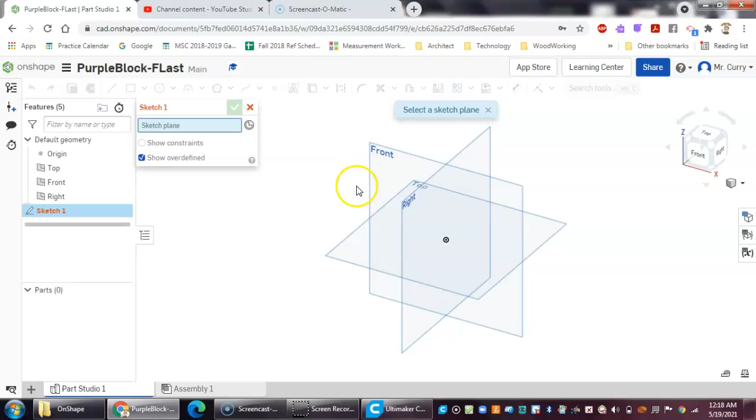So we'll go right here to sketch. We're going to sketch on the front plane. That opens up, and I'll come up here and click my rectangle tool to draw my rectangle. Come right down here and select on your origin and just kind of move it up.

Now notice I'm in the isometric view, so I can draw it this way if you want. If it's easier for you to go over to your front plane and pull up and just have it on the front plane, then by all means use the front plane too.

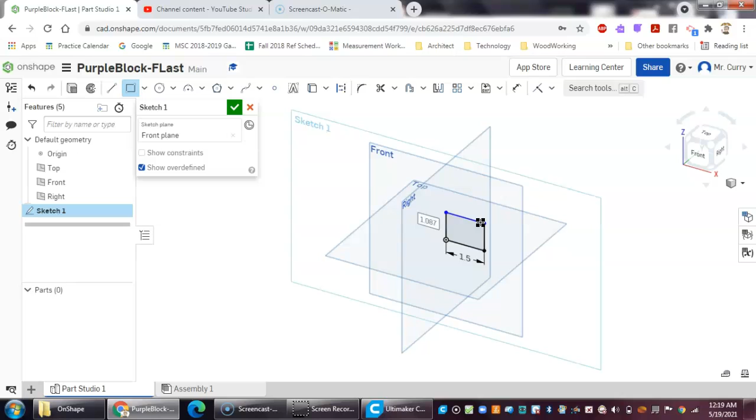So I'm going to left click to place that. First now is my width of 1.5. I'll hit enter, and now I want to set the height of 1 inch, and I'll hit enter. That's all I'm doing right now. So that rectangle is done. We'll click the check mark.

Now I want to extrude that. So let's go ahead and hit the extrude button, come over and select that shape. In this case I want that to be a depth of 1, but I don't want it coming out toward the screen with me. I always kind of prefer to draw it going back into the screen. I don't know why, it's just kind of my habit and preference that I use. I'll go ahead and click the check mark there.

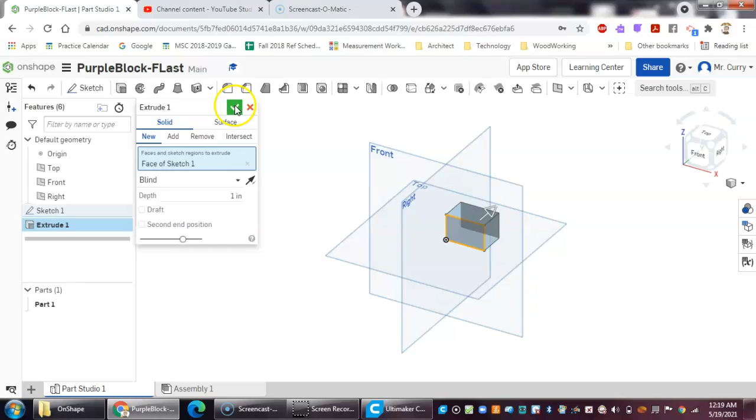Now at this point, I've got a 1 inch high by 1.5 inch wide by 1 inch deep block. We're going to have to select some other surfaces here and think about where we need material to be removed from that purple block. And then we can select different faces to do that.

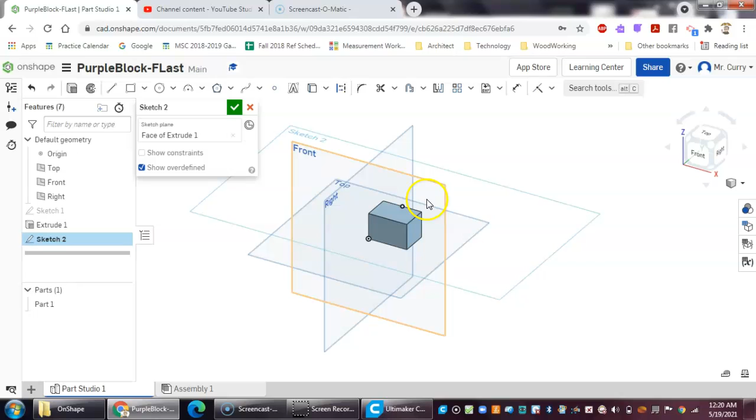So to start with, I know if I'm looking in the top view that I've got some areas cut out. So I'm going to now start my sketch and I'm going to select the top view. Now I don't have to, I could start any place else. This is up to you.

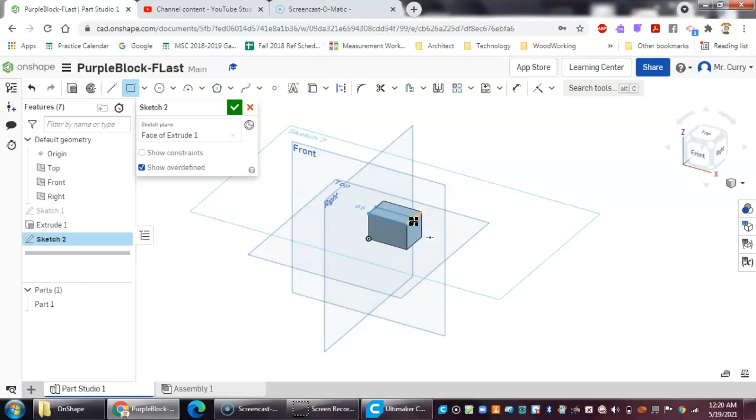So again, I'm going to create a sketch on this. We're going to come right here to the corner and select it. In this case I'm going to move over to the other corner. Notice how it's automatically picking up on those midpoints, which is exactly where I want. Let me zoom in here. So as I come over, notice it snaps into the other side. If I move over, it also snaps into the midpoints, which again is what I want for this part. So I'll click that sketch and I'm done with it.

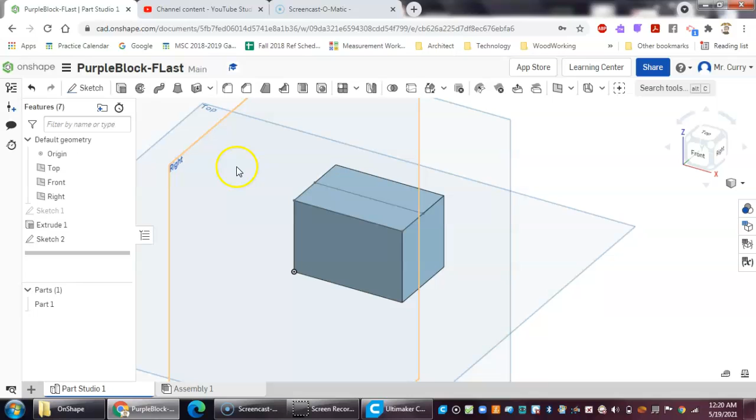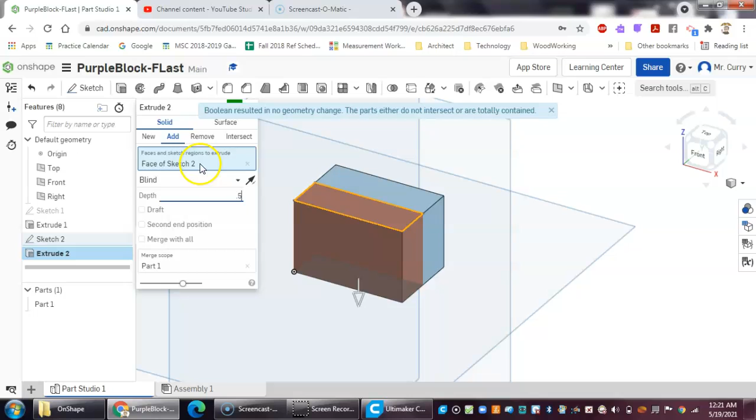So we'll hit the check mark, and now I need to extrude that. I'm going to select that shape. So it's coming up, but I don't want it to come up, I want it to go down. And I need to change the depth here to 0.5, so I only want to go down a half inch deep. And instead of adding, I want to remove that material, so half inch removed, and I'll click the check mark.

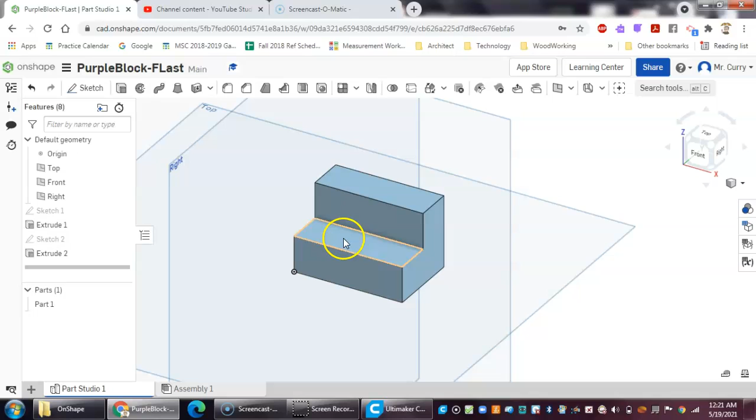So now I kind of have an L shape here. By now hopefully you also realize I've got to come in here and also cut out material here. Now, once again, I can cut material out this way, or I can select this plane to sketch on and cut material out that way. I'm going to go ahead and select this one just to show you one of the other ways that we can use the options that we're given.

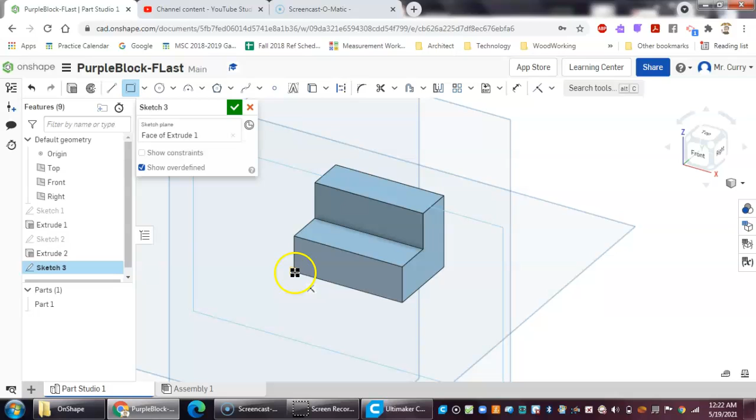So let me go ahead and create a sketch plane here. Again I'm using my rectangle tool. You can use the line tool too if you want, but to me it seems easier to just go ahead and use the rectangle tool. Now notice I come right in, it's going to highlight on that line and snap to it.

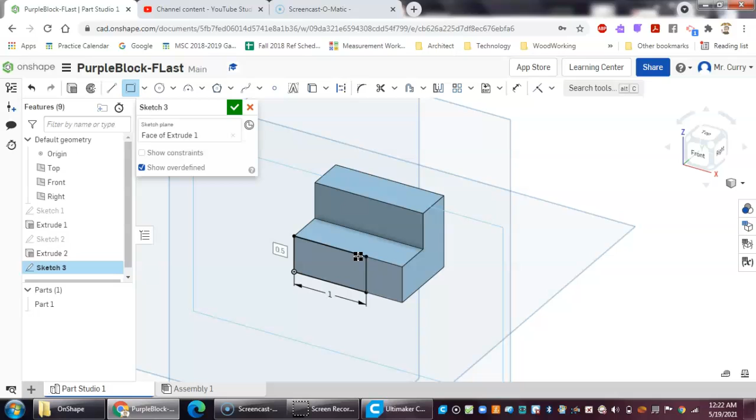So I'll go ahead and left click onto there. Now this is going to be 1 inch here. And of course, our 1/2 inch dimension is already there because we kind of locked that in when we selected that top corner line as well. So that's done, and we're placed there. I'll hit the check mark.

Now I'm going to extrude that as well. So again, this is going to come out to say new and add. We don't want to add material here, we're going to remove material, so we'll click remove.

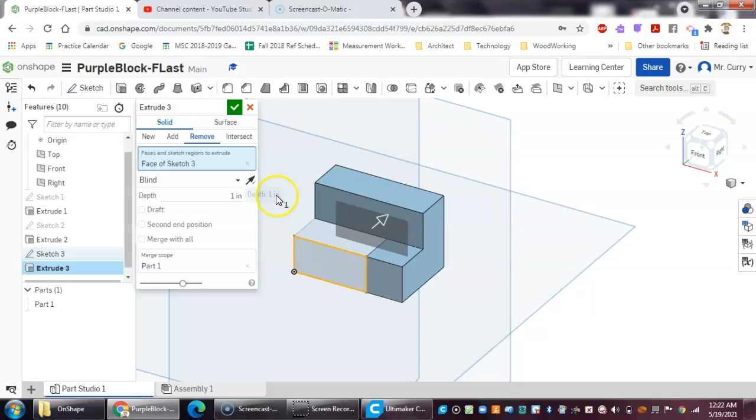Now notice it's saying blind, going 1 inch all the way through. So we don't want it to go all the way through. I'm going to do this though, just to show you. So we're going to check that. Now notice how this looks when we flip around to our different views, how it cuts out. There are times in some of these challenges you might have drawings like this, but this isn't one of them. So notice we don't cut all the way through there.

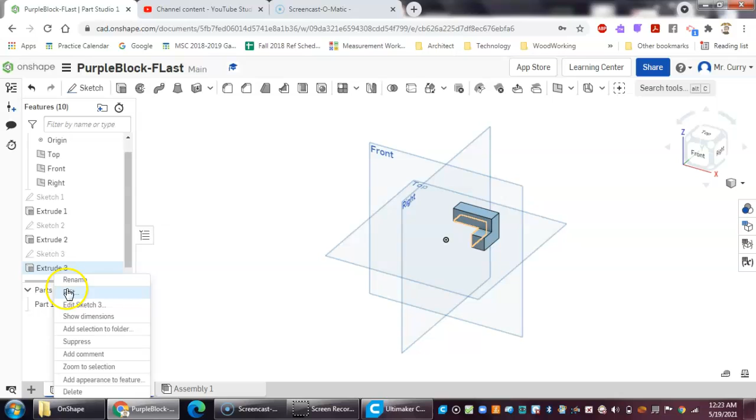So I'm going to come back now to my feature bar over here, where this is showing you all the steps you're taking to draw these. This is good to remember. So I'm going to come right back here to Extrude 3, and I'll right click and say I want to edit that, so it brings that back up.

Now, instead of going 1 inch blind, if I select my end type by hitting that drop down arrow, I can say up to next. So up to next. Now notice, so when it says next, it knows this is the next part where it's going to hit. So let me check mark that. Nope, it took it all the way out. So let's see what's going on here.

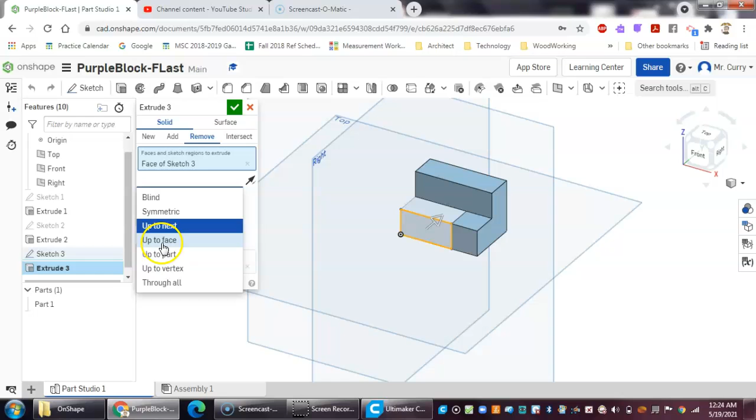Let's go back and edit this extrusion. Notice it removed that. So maybe it didn't like, we're still removing it here. So rather than up to next, let's say up to face, and let's just play around with this.

So see what it's meaning and talking about, up to face, picking the face of sketch 3. Altogether, as you're playing around with this, you'll get different types of experiences. So this is the face that I want to go to, I got to tell it that. I'm going to click that face and tell it, and we'll check mark that. And there you go, so this is what looks like the PurpleBlock, kind of.

So we're missing something here. What are we missing? Well, this corner of this needs to be cut out on the PurpleBlock as well. So let's go back here and sketch now. I'm going to sketch here. I can sketch this way and say through all, or I can sketch from the top and then extrude down. So I'm going to go ahead and select this as my sketch plane.

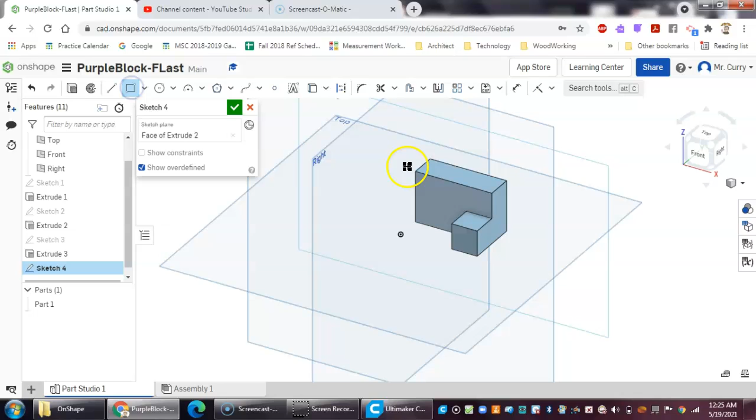We'll draw that. Again, doesn't matter here for my dimensions, I can just kind of drop it. Then it'll come in 0.5, enter, 0.5, enter to get that on there. I've tied this into that corner, so I've kind of constrained it already. Click on the check mark, and now let's go ahead and extrude this.

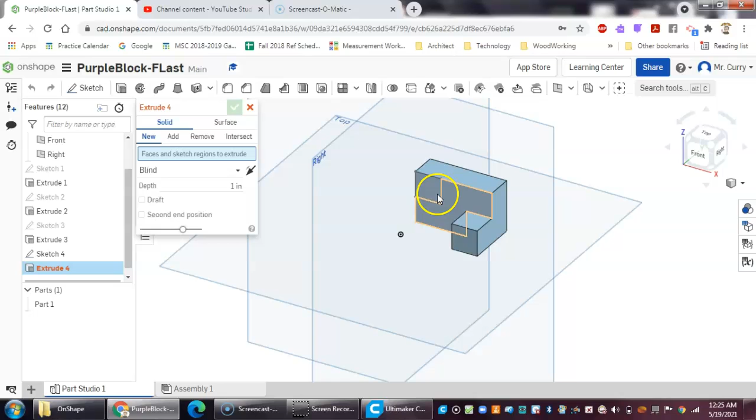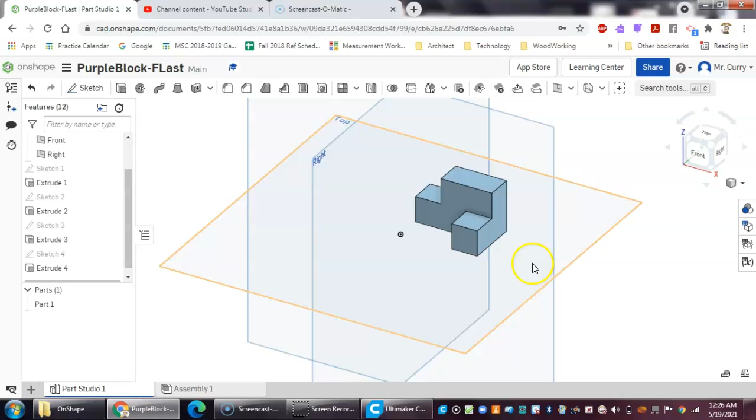Selecting this, notice I could select either one of these shapes right now. This is the one that we want. And in this case, again, instead of adding, I'm going to remove it. And now instead of the blind here, I'm going to say we want to go through all. So, click my check mark. So we've got that shape taken care of.

Just to confirm, let's go to the front view. Looks like what I need in my front view. Let's rotate around to my right view. Looks like what I need in my right view. Come back to the top view. Looks like what I need in the top view. I think I'm good to go with this particular drawing. Go back to my isometric. Zoom in a little bit here.

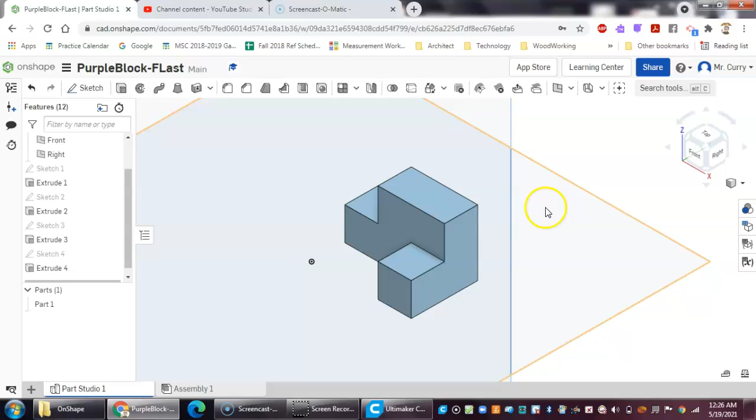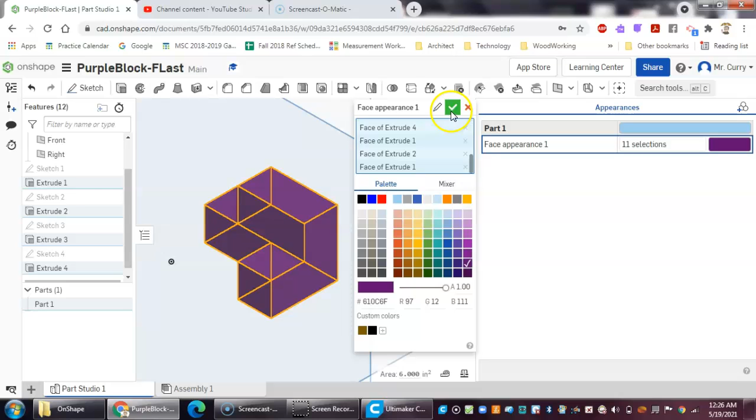And lastly, we want to apply that color. So we're going to come right back over to our appearance panel. Select the add face appearance. Again, in order to do this, we have to window over and select everything that we want to have of that appearance. Then you can just pick whichever purple color you like here, right here. I kind of favor that one, the second one up. Click the check mark, we'll go ahead and close this panel. And our PurpleBlock is done.

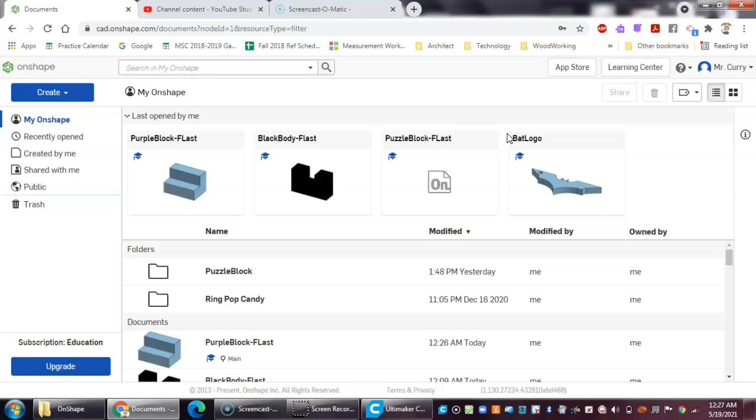So we are ready to go back to our main documents page. And of course, we can then go and make that PurpleBlock, and we can download that and upload that to the assignment in Google Classroom.